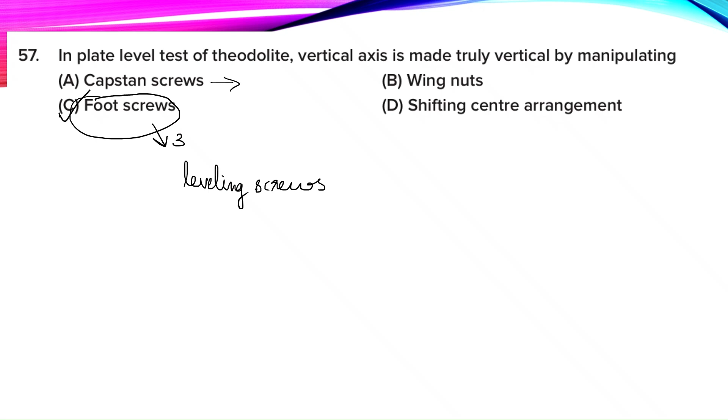Next are wing nuts. They are found on tripod legs and not in the theodolite. These wing nuts allow you to tighten or loosen the leg extension, helping in height adjustment of the leg, and helping to achieve rough initial leveling before foot screw adjustment.

Next is shifting center arrangement. This is a sliding mechanism that lets you shift the theodolite body horizontally on its base, allowing accurate centering over the ground point after leveling is complete. This saves time and increases precision compared to adjusting tripod legs again and again.

So our answer is foot screws. Foot screws help to make the vertical axis truly vertical in the plate level test. Clear?

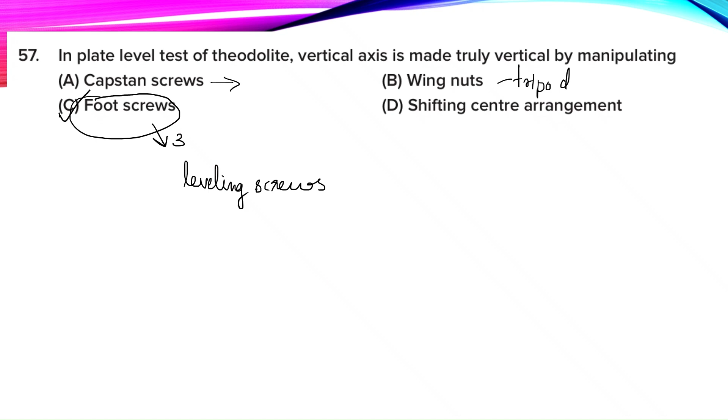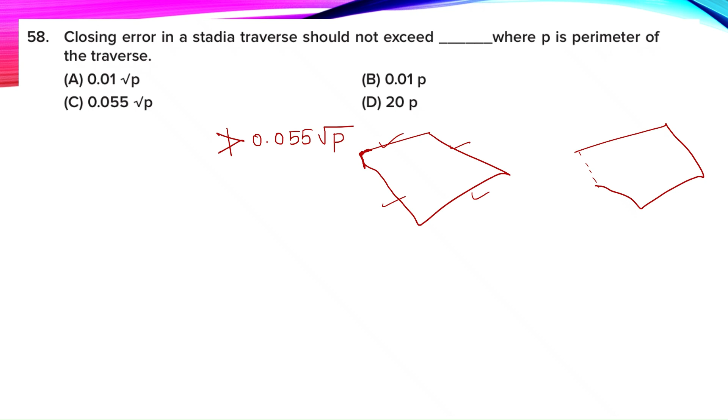In stadia survey, the maximum allowed closing error depends on the total length or perimeter of your traverse. This maximum allowed closing error should not be more than 0.055 square root of P, where P is the total perimeter of the traverse in meters, and you will get the closing error in meters.

If you substitute the perimeter in meters, you will get the closing error in meters. So our answer is option C: 0.055 root P is the closing error in meters if we substitute the perimeter of traverse in meters. Clear?

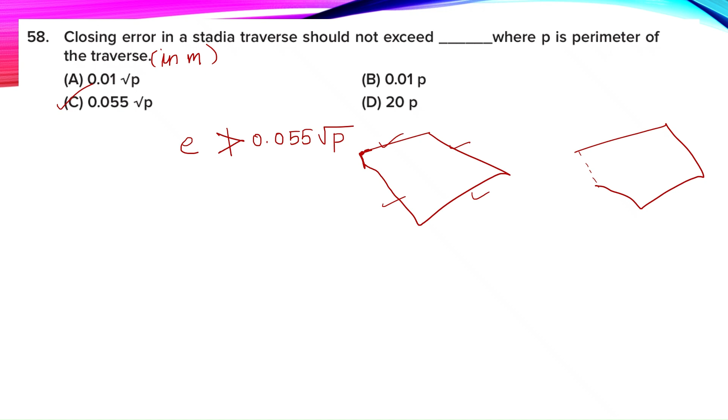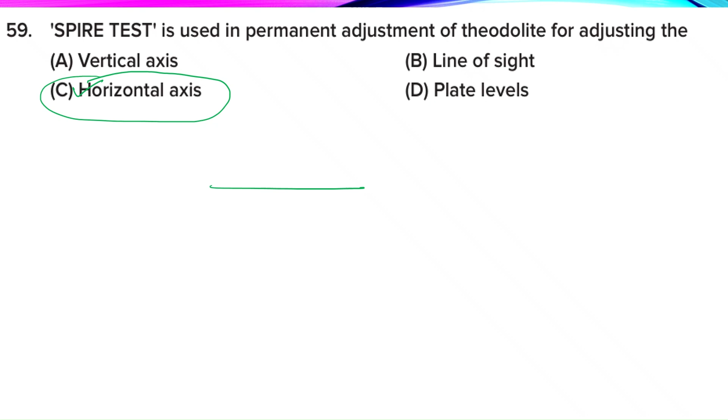Spire test is mainly used to remove the error caused when the horizontal axis is not at right angle to the vertical axis. It is done by sighting a high point like a church top or a spire using the telescope, reversing it, and repeating the procedure. If the point shifts, we can ensure that there might be some mistake in the horizontal axis alignment.

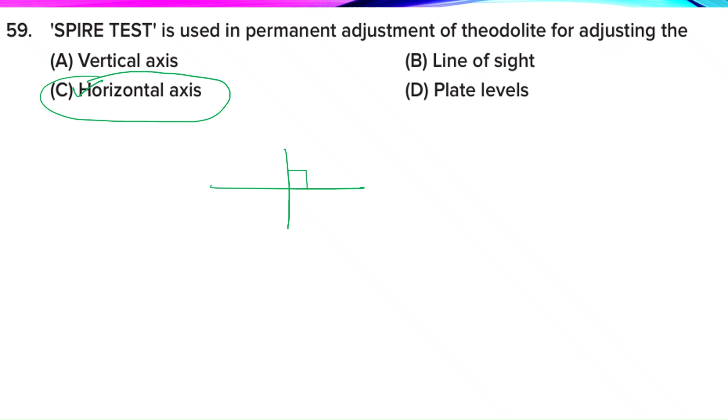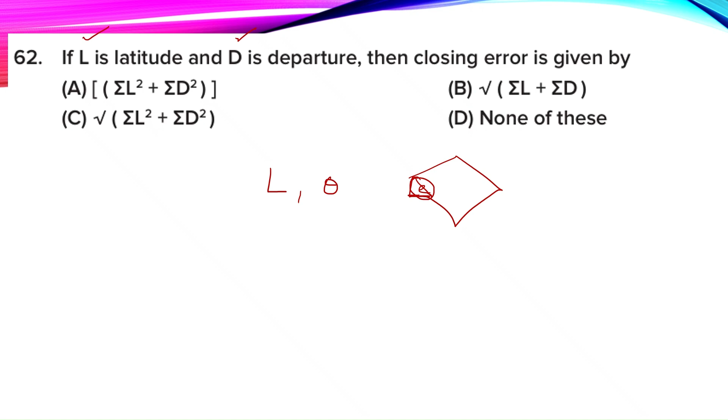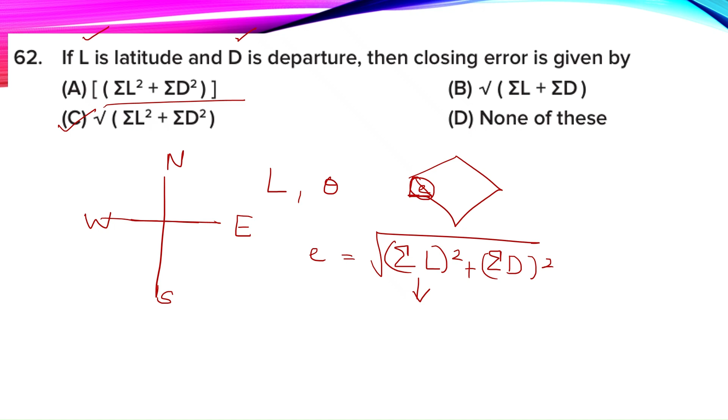If L is latitude and D is departure, then closing error is given by. This question asks how to calculate the closing error in a traverse, given the total latitude L and total departure D. When surveying a closed traverse, you record a series of lengths and directions, known as bearings or angles. After plotting all the sides, if the traverse doesn't perfectly close, it creates a closing error. This error is calculated using Pythagoras theorem: closing error E equals square root of sigma latitude squared plus sigma departure squared. Sigma latitude is the sum of northings and southings, and sigma departure is the sum of eastings and westings, meaning positive and negative distances. This formula gives you the closing error. Option C is the answer.

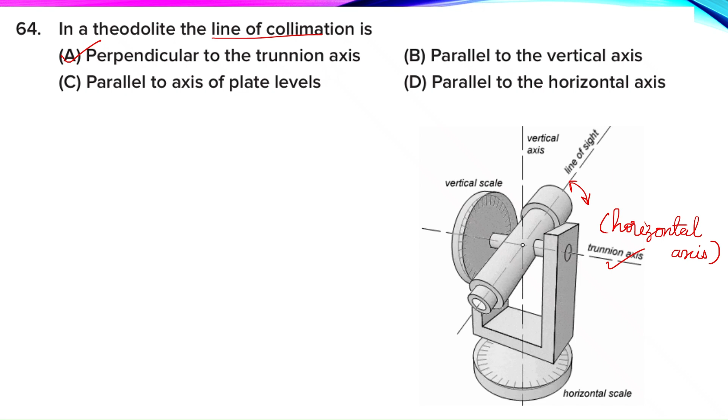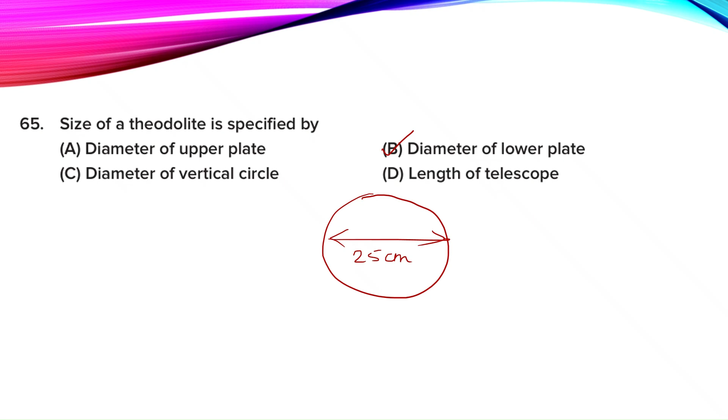Size of a theodolite is specified by: A) diameter of upper plate, B) diameter of lower plate, C) diameter of vertical circle, D) length of telescope. The size of a theodolite is defined by the diameter of the graduated circle of the lower plate, so option B is the answer. For example, a 25 centimeter diameter theodolite means the diameter of the graduated circle of lower plate is 25 centimeter. The size of the theodolite varies from 8 to 25 centimeters. Our answer is option B.